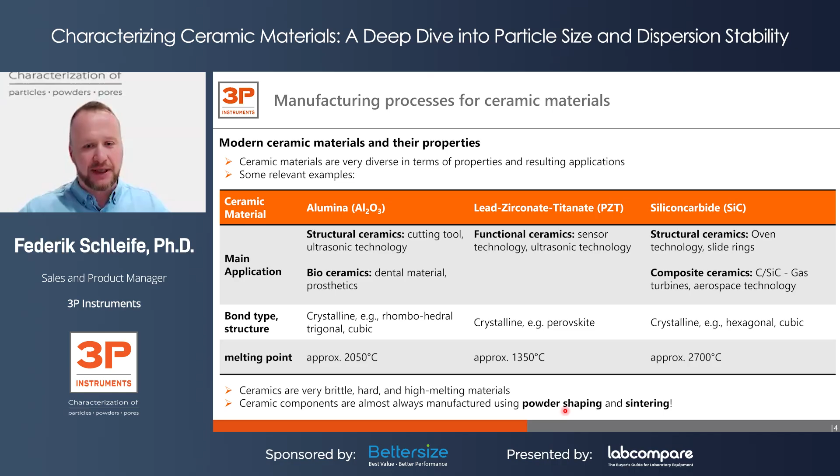What is used is so-called powder shaping and sintering afterwards. Compared to metals, ceramics cannot easily be melted and poured to get them into a new shape, so they need this rather complex process of powder shaping and sintering. Here's how this process is done: it all starts with raw materials—the starting powders, such as alumina, zirconia, or others—as well as the dispersion medium that is needed and some additives.

Additives are used to get the final properties right in shape for proceeding with the process. What's next could be milling to adjust the particle size of the raw material, but not only milling to get it smaller, it could also be granulation.

Why could granulation be needed? Especially if the powder needs to be transported somewhere, it could be advantageous to bring them together into granular material, which eases the transportation. Furthermore, they could be mixed, either two different dry powders mixed together, or mixed with a liquid medium to form a dispersion.

After this further material processing, it gets to the very important step of the shaping process. With this shaping process, the so-called green body is manufactured. This can be done in different ways, which we will see in one of the next slides.

It can either be done in a wet process, like slip casting or spraying, or it can be done in a dry process, like printing presses or hot presses. This step brings the final shape of the piece you want to manufacture and forms the green body. But the individual particles that are pressed together still need to be sintered together to achieve the final performance of a workpiece.

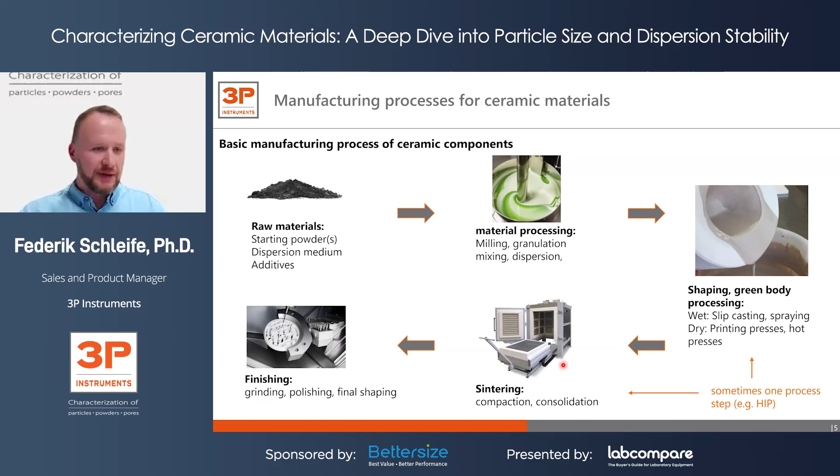As you might have realized, I already gave different names for different processes, but basically they can be divided into two groups for this shaping process. It could either be the dry shaping process, like dry pressing, cold isostatic pressing, but also hot isostatic pressing, which already combines the shaping and sintering process.

But you can also shape these materials in a wet route. Some of those processes include injection molding, slip casting, gel casting. This simply means making a dispersion from powder and a dispersing medium and pouring it somewhere to form the green body during those processes.

Which process you select might mainly depend on the typical application later on. If you go for dry pressing, you might only achieve simple geometries or plates. Maybe this is really cost effective, but does not allow you to form high performance ceramic material.

For others, if you need hard densities or really high performance, you might rather go for some of the wet processes, like slip casting, tape casting, or even tape casting 3D printing, where you can achieve really complex structures or finer workpieces with hard density and high performance.

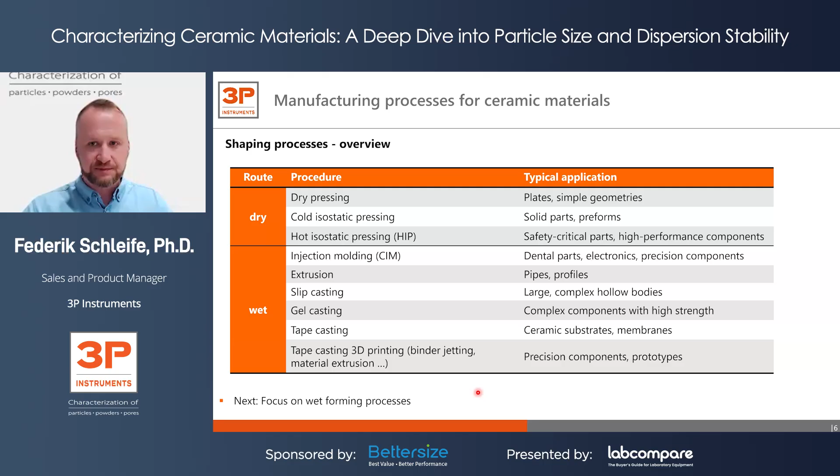As already mentioned several times, there seems to be an influence of particle size distribution, but also the true density of the starting powders, on the process and therefore on the product properties of the ceramic later on.

Let me give you two brief examples of which different types and size ranges we are talking about. Ceramic starting materials are available in various sizes and distribution widths, depending in the end on the application. One example is a sub-microscale zinc oxide, used for the production of resistors, where the majority of particles are below 1 micrometer. This is typically used for such an application.

Furthermore, there are other applications, like this example of microscale indium tin oxide granulates, which are used for electric conductive layers.

So you see here, the size distribution is relatively narrow, normally distributed shortly below 100 micrometers. There's not really a rule that all ceramic raw materials need to be below 1 micrometer or around 100 micrometers. It really depends on the application itself.

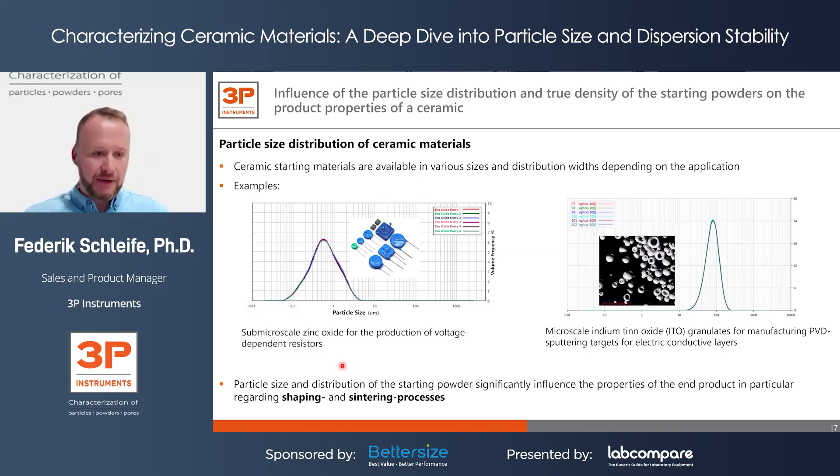First, let's talk about the influence of the particle size distribution on the shaping process itself, during the formation of the green body. What is the main aim of the shaping process? The main aim is that the green body structure later on comes with a high density, a homogeneous pore structure, and small pore sizes.

Why are these three properties of the green body important? A high density is needed to minimize later shrinkage during the sintering process. When the green body is formed and then sintered, this sintering effect will lead to shrinkage. If the density of the green body is not high enough, you get a higher shrinkage, and this is not desired, as you want to keep the dimensions given to the piece during the green body formation.

So why is a homogeneous pore structure needed? Because different pore sizes will behave differently during the sintering process. The larger the pores, the higher the sintering temperature that needs to be applied. The smaller the pores, the lower the sintering temperature could be.

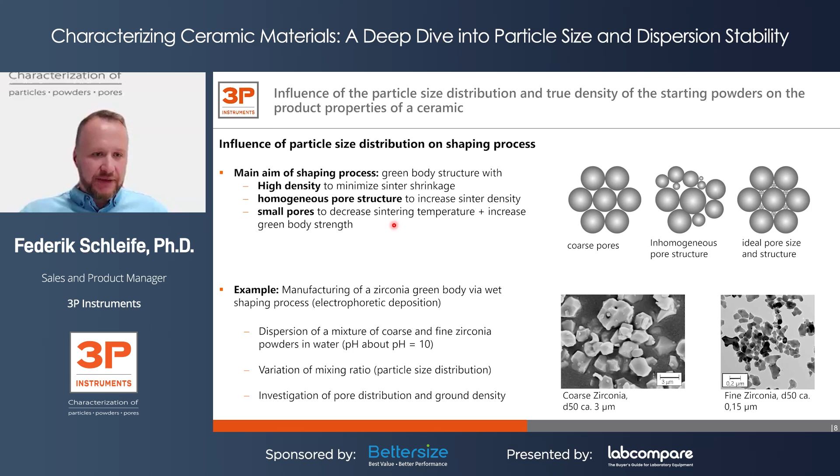For this, I want to give you an example: the manufacturing of a zirconia green body via a wet shaping process during a so-called electrophoretic deposition. There was a dispersion of a mixture of coarse and fine zirconia powders in water with a pH value around 10, and a variation of the mixing ratio of fine and coarse zirconia powder.

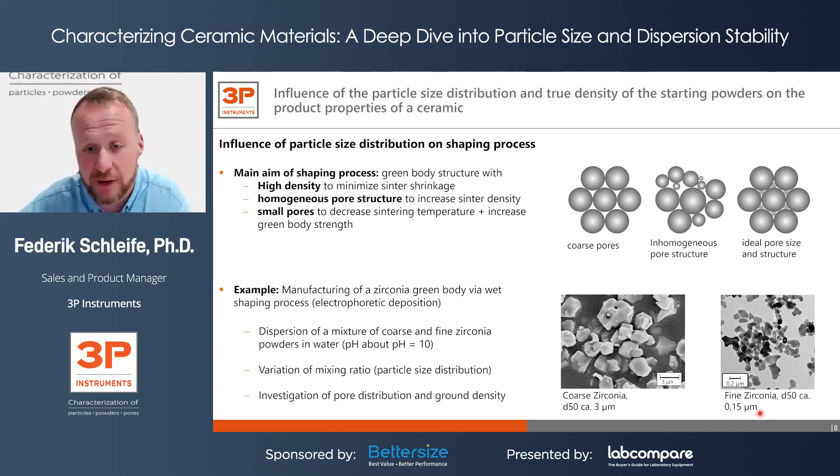It could be investigated, by the pore distribution and also the density, how different mixtures or ratios of coarse and fine zirconia would affect the final process. Here you see electron microscopic images of the coarse zirconia with a D50 of around 3 micrometers, while the fine zirconia comes with a D50 of approximately 150 nanometers, or 0.15 micrometers.

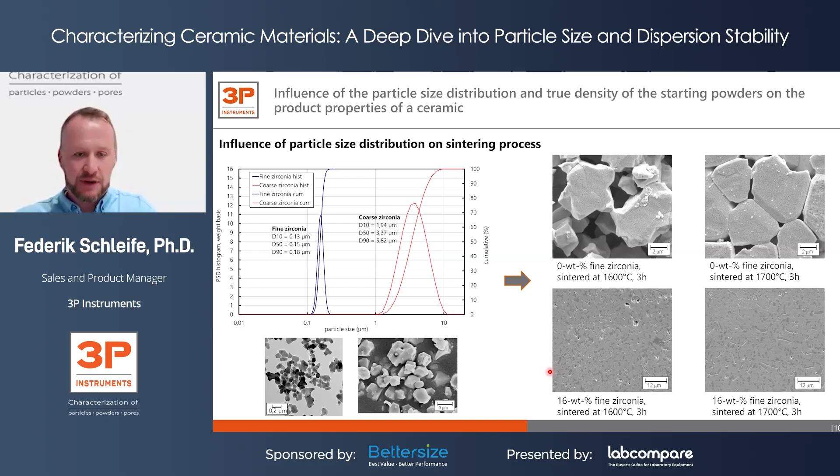So I could show you that adjusting the particle size distribution of the raw material you use for the process has a dramatic effect and influence, either on the green body stability or green body properties, and furthermore, of course, during the sintering process, on the final ceramic piece.

To summarize this a bit: I could show you that when you use pure coarse zirconia with a log normal distribution of around 3.4 micrometers, you might get in the green body one rather narrow peak for the pores around 400 nanometers, but with the lowest relative green density and lowest sinter density, either at 1600 or 1700 degrees Celsius sintering temperature. By increasing the ratio of fine zirconia up to around 10 weight percentage, we got a bimodal size distribution with a D50 of around 3 micrometers.

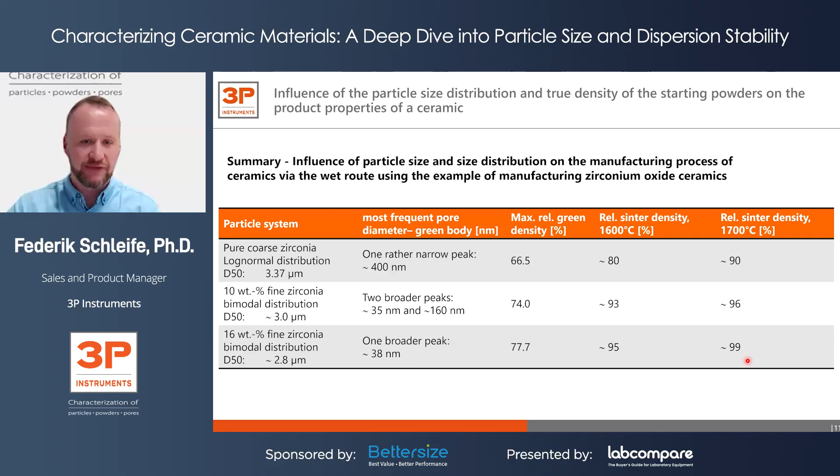For the pore size distribution in the green body, we got a bimodal distribution, so we got small pores and larger pores, resulting in a medium relative green body density and sintering density. Finally, when you use 16 weight percentage of fine zirconia, we got a bimodal particle size distribution with a D50 of around 2.8 micrometers, but we get one pore peak for the 38 nanometer pore diameter, and we achieve really high densities, both for green body and sinter bodies.

So this was for the influence of particle size, but what else can we do with the powder to analyze the ceramic raw material? Another factor that affects the process later on is the true density. I want to show you how the true density can affect the starting powders, or how different densities of starting powders can affect the process or performance of the final ceramic pieces. The true density of a starting powder provides important information about the crystal structure, but also impurities.

Depending on your raw material, for instance alumina or zirconia, they have different true densities. And you can imagine, in case there are impurities in your starting material, you might measure a density different from that of pure alumina or pure zirconia. So true density measurement can already be a quality indicator regarding the impurities of the raw material.

Furthermore, these materials come with different crystal structures, and these could also be identified by measuring the true density. And on the final sintered ceramic, you can also measure the true density, which gives you information about the crystal structure, but also about the sinter density.

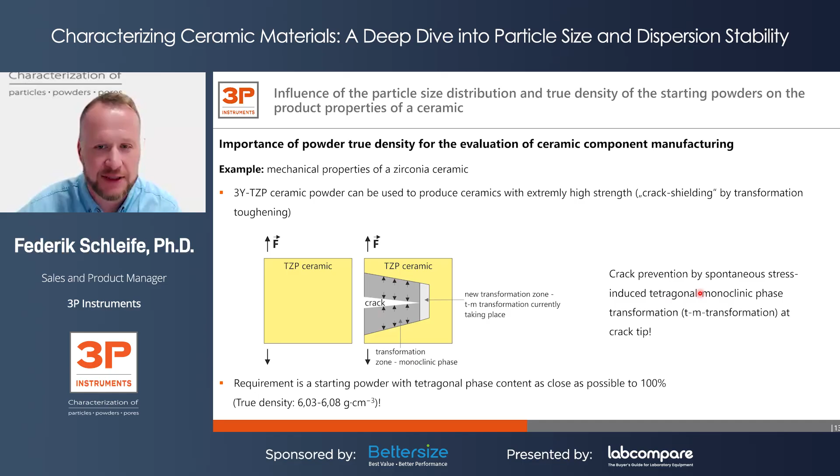What's that? If you apply an external force on a tetragonal zirconia ceramic workpiece, this leads to a crack. The following effect prevents the crack from traveling through the entire system. When there's a crack, it leads to a spontaneous stress-induced tetragonal-to-monoclinic phase transformation, also called T-M transformation.

This happens at the crack tip. Due to the stress applied here, the tetragonal structure will undergo a transformation into the monoclinic structure. As you remember, the monoclinic structure comes with 3 to 5 percent larger volume. This spontaneous increase in volume will prevent the crack from further traveling through the entire ceramic workpiece.

If it were only a monoclinic structure, when there's a crack at one point, this crack might go through the entire piece and you cannot use it anymore. But for high performance ceramics, like in dental applications for teeth, you use those tetragonal structures, because this prevents the piece from being destroyed once there's a single crack somewhere.

So when you want to manufacture such a workpiece, it requires a starting powder with a tetragonal phase, and the tetragonal phase content should be as close as possible to 100%, with no monoclinic crystal structure present. So if you measure the true density of your starting powder in the range of 6.03 to 6.08, you know that this zirconia powder is almost completely in the tetragonal phase, and therefore suitable to manufacture a ceramic like this.

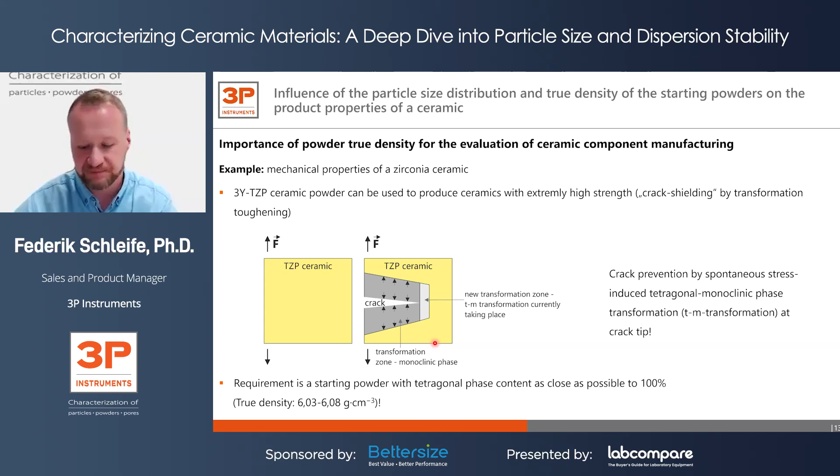So last but not least, let's discuss how slurry stability might affect the manufacturing process of the final workpiece. Slurry stability is important when it comes to the wet route for the shaping process in ceramic manufacturing.

As shown in the slide before, the density of ceramic raw materials is relatively high, especially compared to water - maybe 5 to 6 times the density of water. So ceramic particles might pretty fast start to settle down, to sedimentate in the liquid phase. Therefore, if the particle size is too high, you get really fast sedimentation.

So a smaller particle size would prevent sedimentation for a longer time. If the material density of the particles is very high compared to the medium, or the viscosity of the medium is pretty low, you might also get fast sedimentation. The material density you might not be able to affect, because if you want a final workpiece made out of zirconia, you need to use zirconia particles. But the viscosity of the medium could be adjusted with some thickeners or additives.

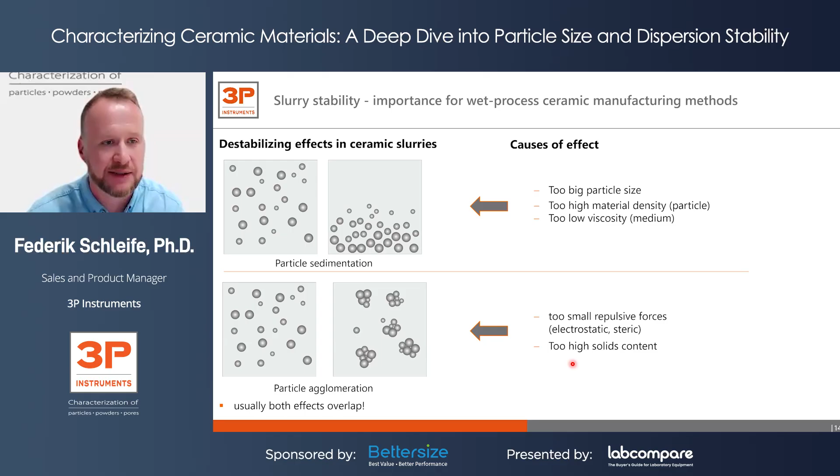Usually both effects overlap with each other, and I'll show you an example which makes it pretty clear that sedimentation or agglomeration would be an issue.

This is a negative effect on the manufacturing process, on the example of tape casting of a ceramic slurry. The tape casting process works in a way that you have a ceramic slurry applied with some blades onto a so-called tape carrier. You have a tape running, and the slurry forms a kind of tape, undergoing a drying chamber, so you could basically form a dried ceramic tape that could be rolled in this shaping process.

But you can imagine if the slurry sedimentates, you get a separation based on solids content and particle size. That means at the beginning of the process you get a lot of large particles, and later on finer particles, which leads to an inhomogeneous dried tape during the shaping process.

Also, when it comes to slurry agglomeration, there's a change in the slurry processing - maybe the viscosity changes during the process, which also leads to inhomogeneous processing.

Furthermore, during the drying process, an inhomogeneous pore structure in the green body will lead to cracking, and in the end, to a smaller green density.

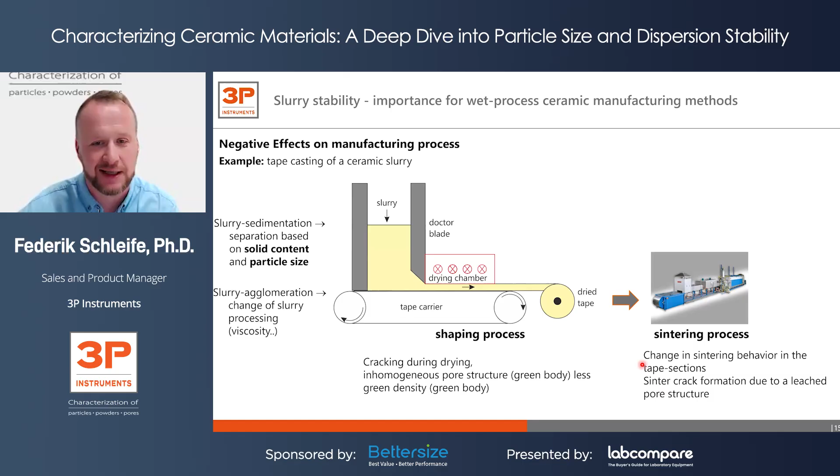So particle sedimentation and agglomeration are likely destabilization effects in ceramic slurries, and you need to try to prevent them, or at least analyze them.

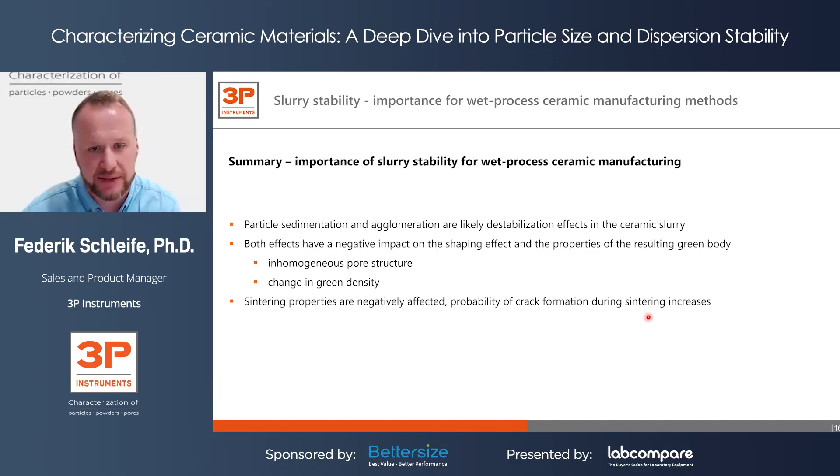Both effects have a negative impact on the shaping process and the properties of the resulting green body, leading to inhomogeneous pore structure, a change in green density, and the sintering properties might be negatively affected, increasing the probability of crack formation during sintering.

So let's come to an end for the first part. I'd like to hand over now to the second part.

With laser diffraction, I hope I could show you that particle size has a major effect on the process itself. Therefore, laser diffraction is a supporting measurement method for investigation and optimization of the ceramic manufacturing process. One instrument that allows you easily to characterize such powder materials, but also later the slurries, is the Bettersizer 2600.

It comes either with a wet dispersion module BT802 or a dry dispersion module BT902, which allow you either the characterization of dry or wet samples.

So why is this widely used, and what are the advantages of laser diffraction?

First is that laser diffraction gives you a really broad and large measuring range. The measuring range for the Bettersizer 2600 starts already at 20 nanometers and goes up to several millimeters. So you can span a really wide range, whether it's submicron ceramics or micrometer particles, they can be measured.

Dry and wet dispersion is available. A laser diffraction measurement is pretty fast, you get a result within a few seconds, and it gives you very good resolution. So even if you mix different powders with each other, you could easily resolve a multimodal distribution. Therefore, you can easily monitor the quality of the starting powders, your raw material, and also monitor any granulation or milling processes, or later on identify and indicate heavy agglomerations if you check the final slurry.

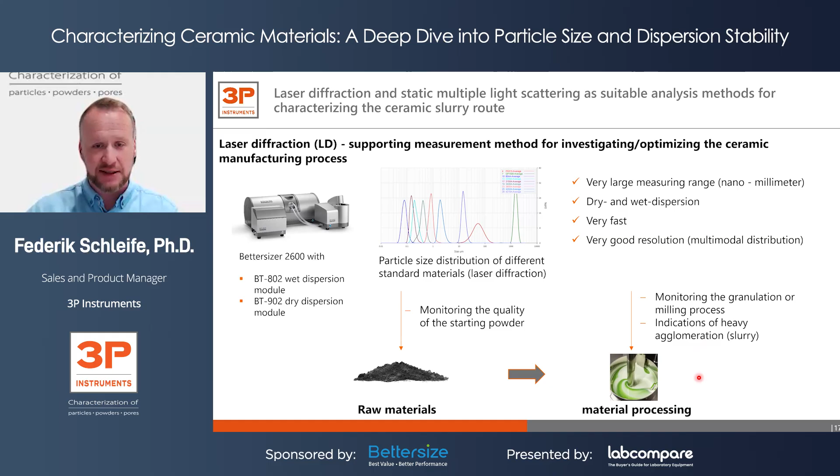Even better, if you combine on a modern approach the laser diffraction with dynamic image analysis, like it can be done with the Bettersizer 2600 and the PIC1 imaging module, you get additional particle shape parameters for further specification of your powders and particles. And combining laser diffraction and dynamic image analysis, you can even increase the accuracy in the coarse range, which might show you if there are any oversized particles in there.

So again, it works pretty well for the raw material with additional information and improvements for feeding compaction or others. And also you can get additional information for your slurries, like the flow behavior, the slurry solid content, and others.

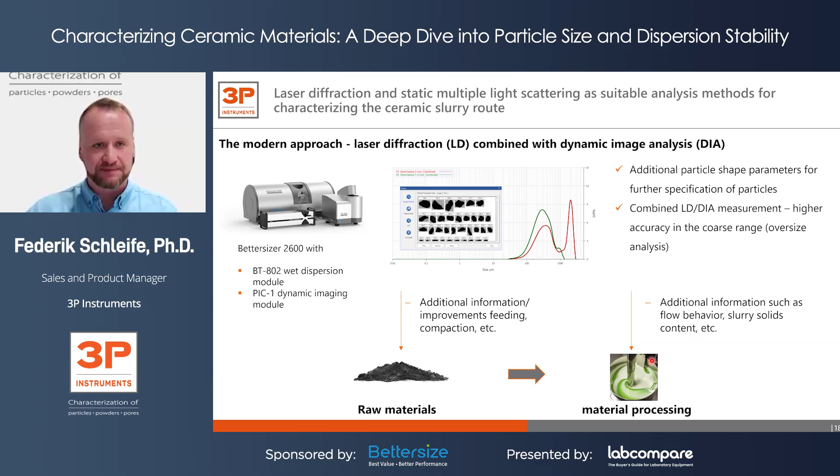To analyze the dispersion stability, there's one instrument or technique that is widely used, static multiple light scattering, for the qualitative and quantitative characterization of ceramic slurries. With the BeScan Lab, which you will see in the second part, you can analyze sedimentation and/or agglomeration behavior of those slurries in a great way.

So it gives you really a qualitative verification of the effects of sedimentation and agglomeration. It allows you to quantify those destabilization effects via the so-called instability index, and it offers concentrated and/or diluted dispersion measurement by measuring in transmission and backscattering. So this is mainly the stability test for the finer ceramic slurry.

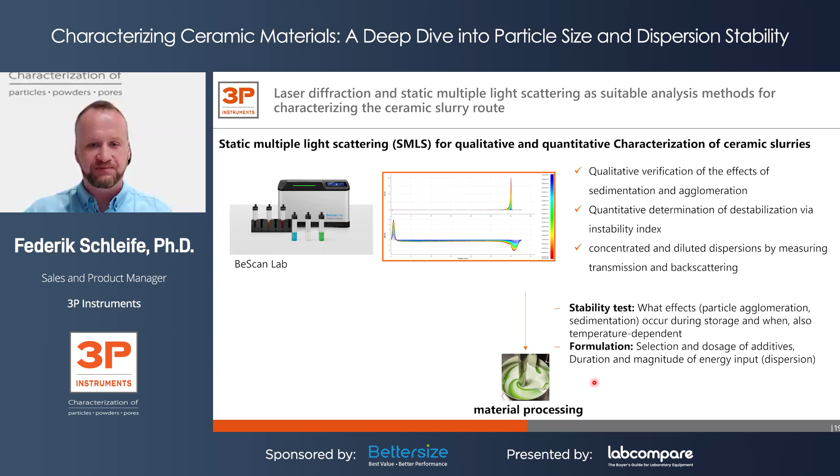So that's for my first part, and with this it's my pleasure to hand over to Wenjian for the second part, where we get more details about the analysis itself, the technique itself, and the instruments that are used to characterize the ceramic materials. Thank you, Freddy, for your comprehensive introduction.

Hello everyone, I'm Wenjian, an application scientist from Bettersize. We have just learned how ceramics are made, from raw mineral to finished products, and why particle size plays such an important role across the manufacturing process. We also saw how green density and slurry stability affect the quality of ceramic. In this slide, I will explain how these parameters can be measured and share some real application cases.

In part one, I will demonstrate the measurement principle of laser diffraction and dynamic imaging for particle size and shape analysis, and the benefits of combining these two techniques.

So what will happen if we don't carry out particle sizing? The answer is that the product's quality cannot be guaranteed, because uncontrolled particle size often leads to structural defects. There are various processing methods for ceramic material, and particle sizing can be performed in several critical steps. For example, particle sizing can be used for quality control to monitor the particle size of raw material, or to evaluate whether the material is evenly mixed before further processing.

Shaping is a crucial step in ceramic manufacturing, and different shaping methods specify different requirements on particle size and distribution in powder. Here I will list some examples. In dry pressing, ceramic powder will be filled into a die and pressed by punches, whose particle size and distribution needs to be specified to make sure of good packing efficiency.

Sometimes particle sizing for granule is also necessary, since granule with appropriate size increases particle flowability. In slip and tape casting, ceramic slurry will be poured into a mold. Control of particle size is critical since slurry stability is greatly affected by particle size, and a stable slurry reduces the possibility of cracking or warping.

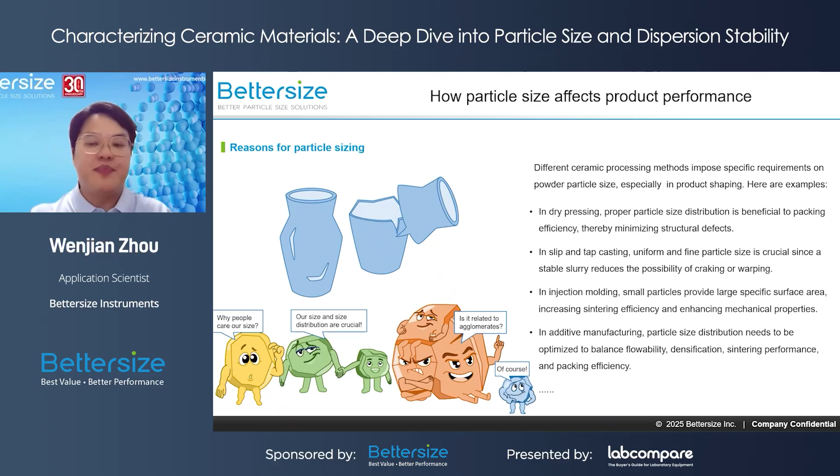In 3D printing, particle size and distribution needs to be optimized to balance the flowability, densification, sintering performance, and packing efficiency. On the previous slide, we learned how particle size affects the manufacturing of ceramic product. But then comes the question, what is the most popular way to measure particle size? The answer is the laser diffraction technique. In this slide, we will figure out how we use laser diffraction to analyze particle size.

Imagine a particle in the measurement zone irradiated by a laser beam, so part of the light gets scattered. Scattering can be considered the combination of four light phenomena: reflection, attenuation, refraction, and diffraction.

Let's focus on the right part of the slide. If the particle is large, most of the light is scattered in the forward direction, resulting in a diffraction pattern with an intensive central spot. As the particle size increases, the central intense peak becomes narrower in the diffraction pattern.

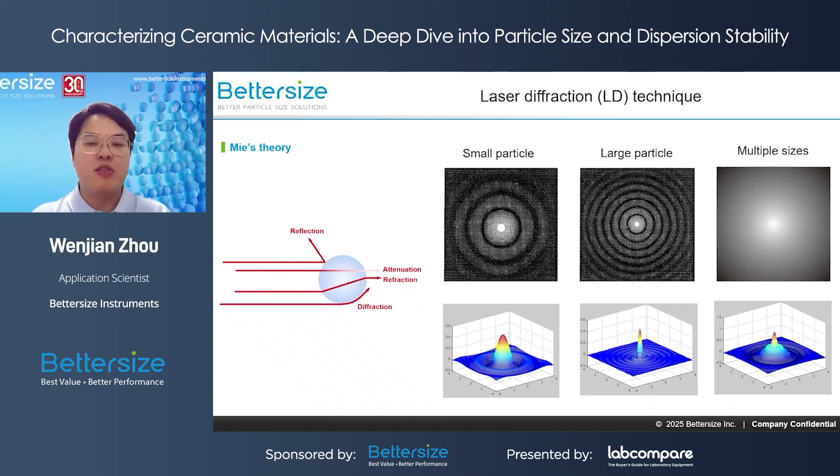Suppose there are many particles in the sample cell. The overall pattern can be considered the superposition of diffraction patterns caused by individual particles. These scattered signals are then received by the detectors and further processed by the software to calculate the particle size distribution based on Mie theory.

We have gone through the basic principle of how laser diffraction works to determine the particle size. Let's take a closer look at the actual particle size analyzer.

An illustration of the simplified interior structure is shown on the right side. In general, samples need to be added to a dispersion module and transported to a sample cell, where they will be irradiated by a laser beam, producing scattered signals to be analyzed by the software.

What Bettersize can offer is the Bettersizer 2600 Laser Diffraction Particle Size Analyzer, which provides reliable and accurate measurement with its patented optical design ranging from 0.02 to 2600 micrometers.

This instrument is also characterized by multiple dispersion modules, allowing it to handle a wide range of samples, from dry powders and liquid suspensions to organic materials, and even valuable samples with small volumes.

What's more is the Bettersizer 2600 can be equipped with a dynamic imaging system, which enables the measurement of coarse particles up to 3,500 micrometers and provides detailed particle shape parameters. An auto-sampler is also available for fully automated measurement of up to 60 samples with just one click.

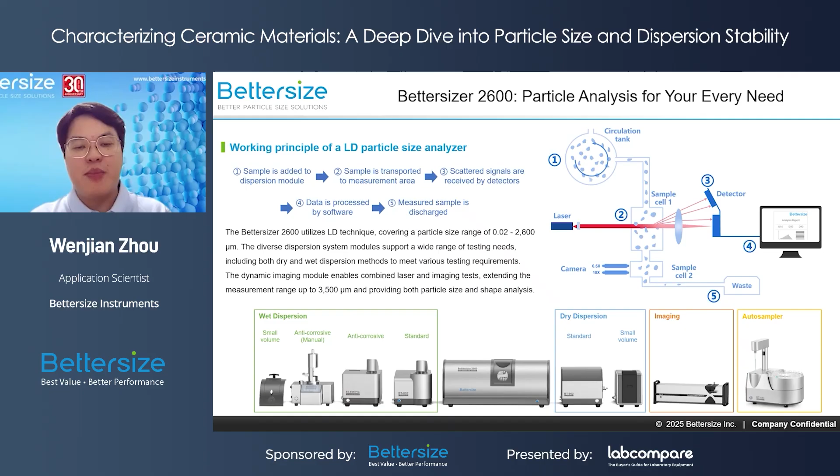In this way, the Bettersizer 2600 not only offers versatile dispersion modules for different sample types, but also enables dynamic image analysis for detailed particle size and shape characterization, and supports fully automated measurements using a dedicated auto-sampler to minimize human intervention. As we know, the laser diffraction system already provides a wide measurement range.

So why do we combine the laser diffraction system and the dynamic imaging system, and what benefits can we get from this combination technique? Let me answer the first question: why we need a dynamic imaging system.

Suppose there are few coarse particles among a large number of small particles. The scattered signal intensity from the coarse particles is very weak compared to that from the small particles. As a consequence, the scattered signals caused by the coarse particles are hidden, appearing either as noise signal or as part of the scattering contributed by the small particles.

Image analysis solves this problem by capturing images of individual particles, including the few large ones, and processing them to generate size and shape parameters.

Images do not lie. They provide intuitive results so that we won't miss coarse particles, and up to 24 particle shape parameters can be provided, including circularity, Feret diameter, and aspect ratio.

Besides, the dynamic imaging system is highly sensitive to coarse particles, extending the upper measurement limit to 3,500 micrometers. Outlier particles, such as bubbles and agglomerates, can be reviewed because each particle is photographed, which can further be used to evaluate whether the dispersion status of the sample is good or not.

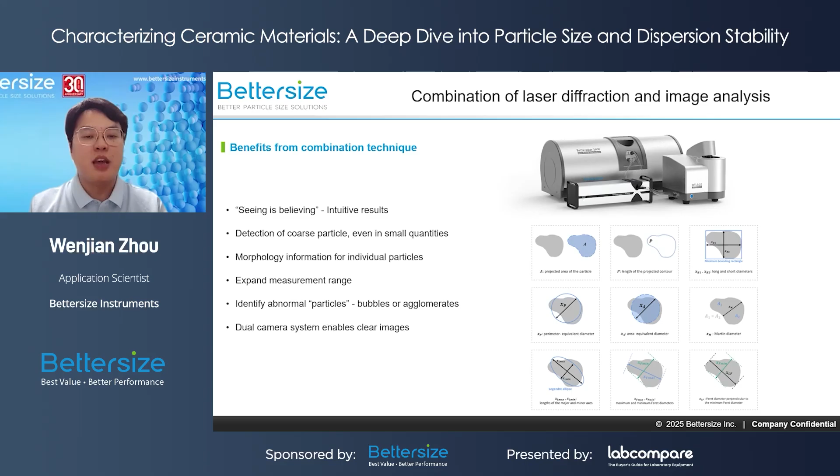Two cameras with different magnification are installed in the dynamic imaging system to ensure clear images of every particle. Therefore, measurement accuracy can be guaranteed.

Here is a real case that shows why it is important to detect unexpected particles. The sample here is zirconia powder, which we disperse in water for full dispersion. As mentioned earlier, even a small amount of abnormal coarse particles can significantly affect the final performance of the product.

Let's focus on the particle size distribution curve. If we only use laser diffraction, we get an orange curve, and everything looks normal, with no signal of abnormal coarse particles. But when we activate the combination test, something interesting happens.

We can see there is a small ghost peak at around 120 micrometers. And when we check the individual images of the particles, we can notice that there are particles whose size is around 120 micrometers in the sample. This indicates the high sensitivity of the dynamic imaging system to coarse particles.

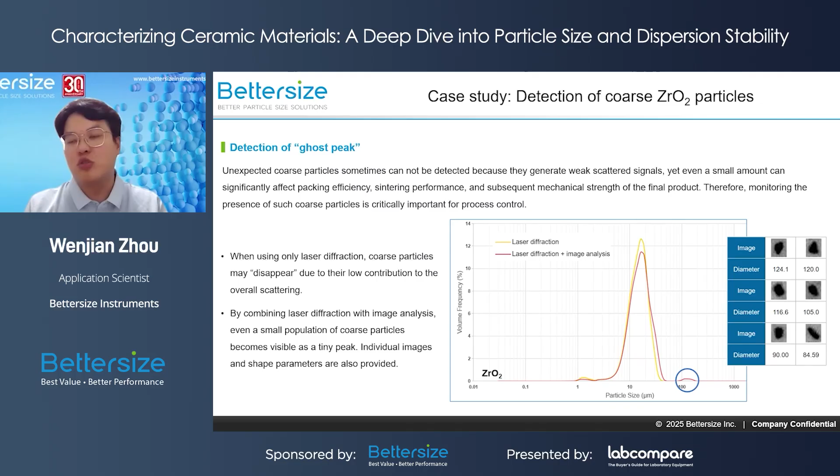Okay, we already know how to measure particle size by combining laser diffraction technique and image analysis. Let's shift to another important parameter, the true density.

The true density is defined as the mass of the solid material divided by the volume it actually occupies, excluding the volumes of open pores, closed pores, and interparticle pores.

True density is essential in ceramic manufacturing, especially in the shaping step, as it provides a basis for evaluating sintering behavior. It can be used to help us understand porosity.

This is critical because applications have different requirements on porosity level. For example, structural ceramics are made of dense material for strength, while catalysts need high porosity for specific surface area.

And the true density allows us to optimize slurry solid loading. When preparing a slurry for casting or 3D printing, knowing the true density ensures the right particle volume fraction, which can prevent structural defects. True density also helps us predict the shrinkage and the final dimension.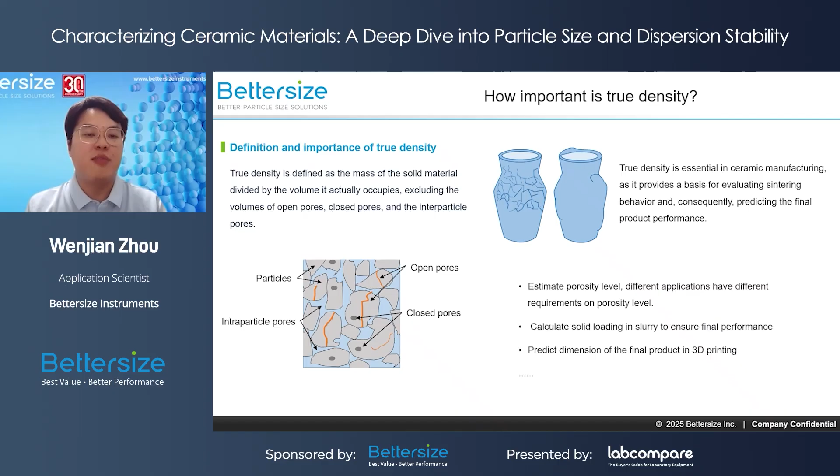Using true density, we can calculate how much shrinkage to expect and optimize design so the final part is the correct size. In short, understanding it lets us achieve precise and high performance ceramic every time.

So, how can we test true density quickly and convincingly? The answer is using a gas pycnometer.

Before getting to know what a gas pycnometer is, we need to understand the principle behind it. The key of the principle is Boyle's law, and it demonstrates that a gas pressure times the volume is constant when the temperature and the mass of the gas are constant.

By applying this law, let's see how a gas pycnometer calculates the true density. A typical gas pycnometer has a sample chamber, a reference chamber, a pressure transducer, and three main valves: the fill valve, expansion valve, and a vent valve.

Imagine we are using a gas pycnometer now. We start the measurement by opening the lid and placing the sample in the sample chamber. Close the lid, keeping the expansion valve closed. Open the fill valve to allow a specific amount of gas to enter the sample chamber. Then close the fill valve.

The pressure at this point is recorded as P1. Next, we open the expansion valve, allowing the gas to flow through the sample chamber to the reference chamber. Once equilibrium is reached, the pressure is measured as P2.

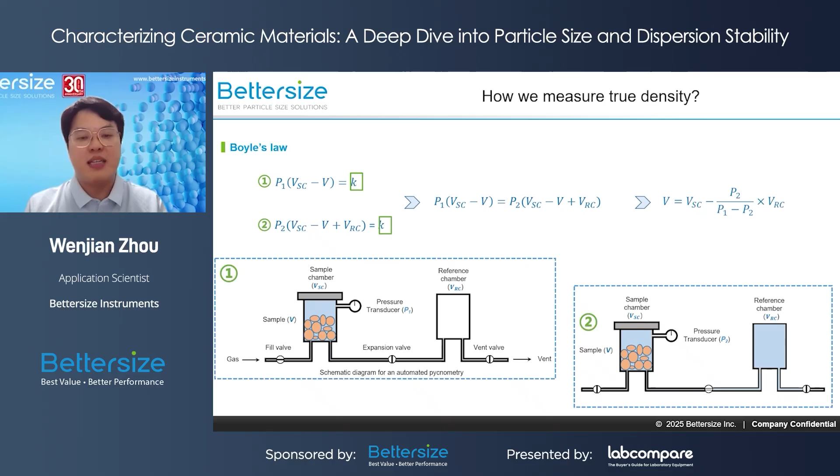Suppose the volume of the sample is V, and we can use Boyle's law to obtain two equations. The volumes of the sample chamber and the reference chamber are already known, along with the recorded values of P1 and P2, so the volume of the sample can be calculated by the software. With the sample's mass easily obtained with a precise balance, we can then determine the true density.

With the gas pycnometer from Bettersize, we benefit from enhanced capabilities. The BetterPyc 380, combined with its user-friendly software, provides extensive measurement options, including volume, density, solid content, and open cell content, making it suitable for a broad range of applications.

It offers rapid, highly accurate measurements with an accuracy of 0.02% and operates within a flexible temperature range of 10 to 65 degrees Celsius, accommodating diverse sample conditions.

The system can also be equipped with 316 stainless steel sample cups, ideal for handling corrosive material like cement to ensure long-term durability.

With a volume capacity ranging from 1 to 100 cubic centimeters and automatic chamber volume matching, it adapts to various sample sizes. In summary, the BetterPyc effectively measures hard foams, liquids, solids, semi-solid mixtures, and slurries, making it a highly adaptable solution across industries.

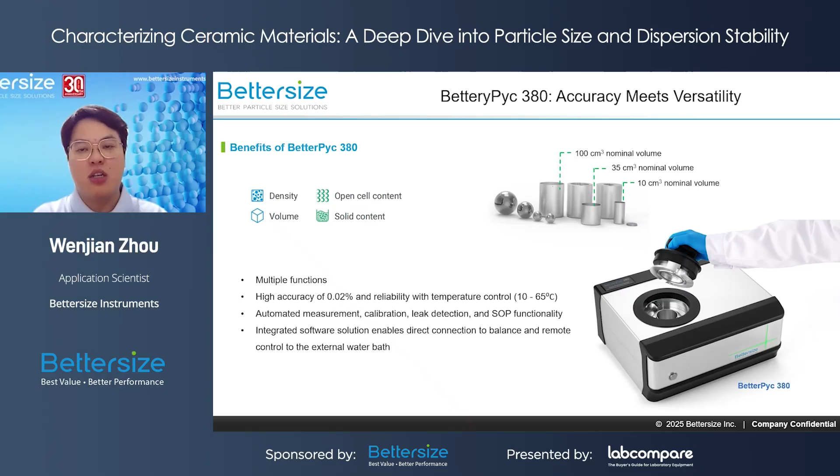Based on the measured volume and the true density, three yttria-stabilized zirconia ceramics were analyzed to evaluate the porosity level of the material to determine the appropriate 3D printing parameters for ceramic prostheses.

If the porosity level is high, the green body shrinks greatly after sintering, probably leading to structural issues or non-specific size. Understanding this parameter is crucial because it directly affects the final dimensions, mechanical properties, and overall performance of the printed ceramic parts.

Samples with a porosity level between 10 and 15% are generally considered good. We measured 3 samples, and sample 1 performed better than samples 2 and 3 because it has the lowest porosity level.

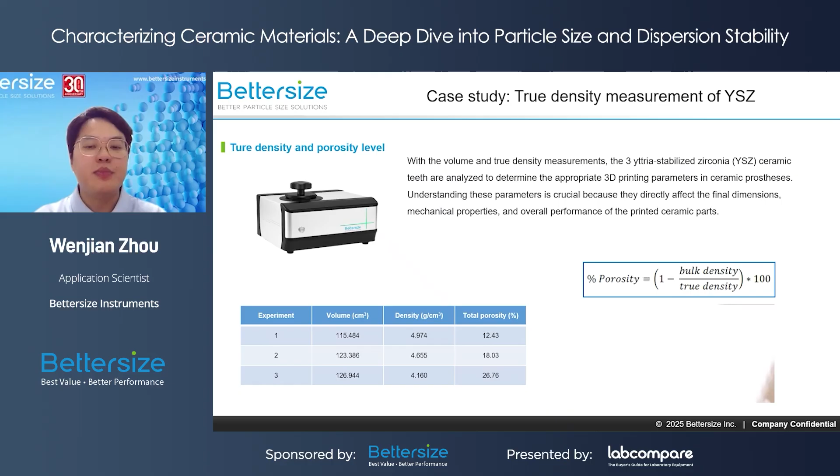So far, we have talked about two techniques for measuring particle size and true density in dry powders. Now let's shift our focus to something different: a method that helps us understand the stability of a liquid suspension.

So what do we mean by stability? In general, stability is the ability to resist changes. When we talk about dispersions, it means how well the particles can stay evenly distributed without sedimentation and flocculation.

Now, what actually affects this stability? First, we look at interparticle force. On one hand, we have van der Waals attraction, pulling particles together. On the other hand, we have electrostatic repulsive force, pushing them apart. The balance of these two is explained by the DLVO theory, which describes how this force changes as the particles get closer or farther from each other.

Moving on, let's think about steric hindrance. This happens when polymers or surfactants coat the surface of the particles, creating a physical barrier. That barrier makes it harder for particles to stick together, which helps improve stability.

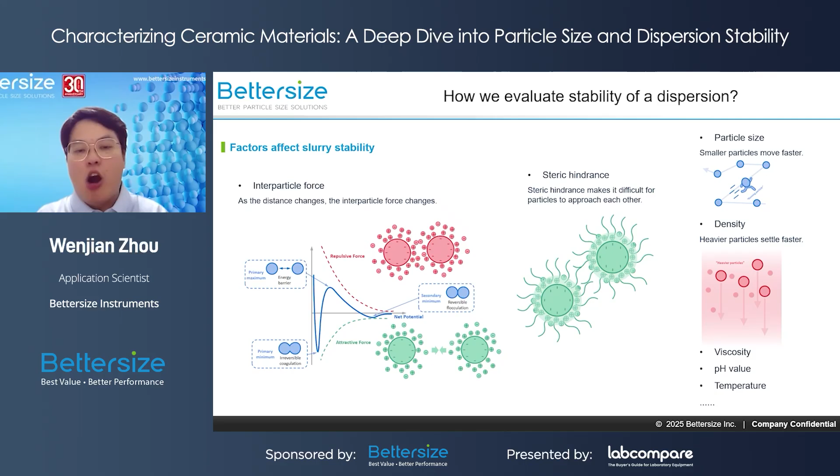Another important factor is particle density. If the suspended particles are much heavier or lighter than the liquid around them, they tend to settle or float more easily, which lowers stability. And finally, we shouldn't forget about other conditions like viscosity, temperature, and pH. All of these can influence how stable the dispersion is.

We have talked about the factors that influence dispersion stability. The next question is, how can we actually evaluate the stability? The answer is the static multiple light scattering technique.

It is an optical method to evaluate stability by detecting the variations of transmitted and backscattered signals. If the signal variation is slight, that means the changes in the dispersion are slight as well, and in turn the slurry is stable. Here I demonstrate how SMLS works.

A setup that contains an LED, a forward detector, and a backward detector moves vertically along the sample cell to capture the transmitted and backscattered signal every 20 micrometers. For transparent samples, we use the forward detector to capture the transmit signal. If the sample is opaque, we use the backward detector, since in this case transmission is almost blocked.

Let's take sedimentation as an example. Suppose the sample cell is placed horizontally, so the x-axis represents the height of the sample cell, and the y-axis is the reference backscatter signal. Over time, we observe that the signal increases at the bottom and decreases at the top.

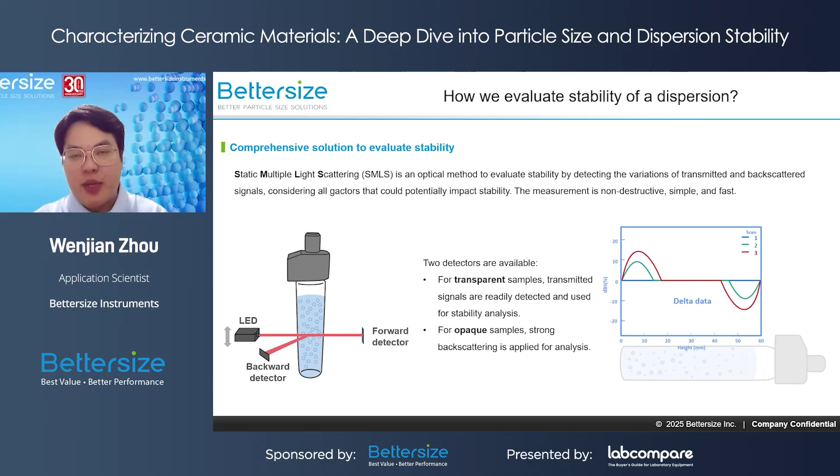In addition to qualitative analysis, we can also perform quantitative analysis using what we call the instability index, or IUS. IUS is calculated by accumulating the variations in light intensity between two consecutive scans. The principle is simple: if the light intensity changes a lot, the IUS value goes up. And the higher the IUS, the less stable the system is.

Now, because each scan provides a new IUS value, we can generate an IUS trend curve over time. This allows us to see not only how quickly the IUS increases, but also how long it takes for the IUS to reach a certain value. What's more, we can also use this IUS to compare different samples. By looking at their IUS values, we can directly figure out which slurry is more stable.

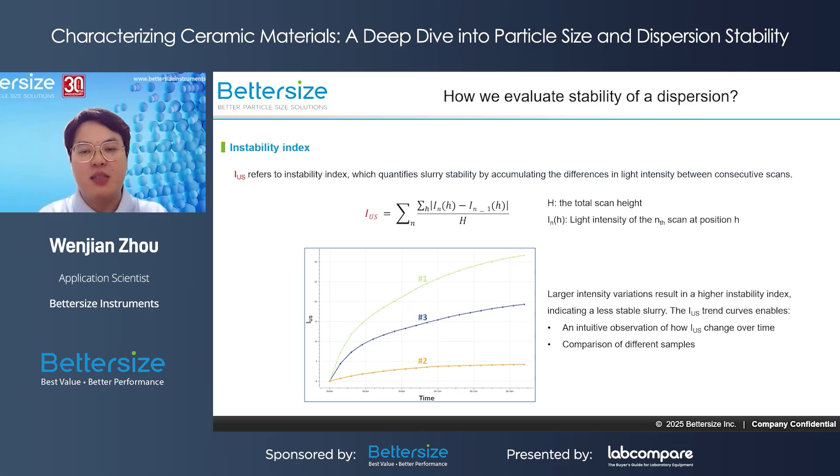At Bettersize, we offer the B-Scan Lab, which utilizes the SMLS technique to analyze slurry stability. The measurement process is non-invasive, simple, and fast, meaning we can measure the sample directly, without any preparation.

And thanks to its optical system, the B-Scan Lab can handle a wide range of samples, from diluted and transparent ones to opaque samples with high solid loading. The signals are captured every 20 micrometers, and because the scanning interval is so small, even the most subtle variations in light intensity can be detected.

For efficiency, up to 10 B-Scan Lab units can be connected to a single computer, allowing 10 individual measurements to run simultaneously. This not only increases operational flexibility, but also saves valuable time.

Temperature control is available from room temperature up to 80 degrees Celsius. This makes it possible to study stability under high temperatures, or to track how the IUS changes with different temperatures.

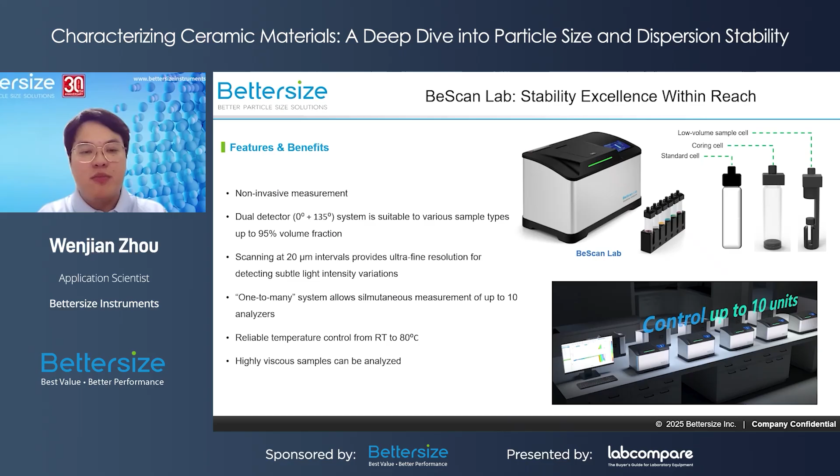Finally, we offer three types of sample cell. In addition to the standard cell, we have a coring cell, which is designed for highly viscous samples, and a low-volume cell used for valuable samples.

Let's take a look at a real case of stability evaluation. In this measurement, we measure four zirconia slurries. At first glance, all four samples look exactly the same.

In fact, no changes could be observed with our naked eyes. In this case, we need to ask BeScan Lab for help.

In most cases, slurries are highly viscous since their solid loading is very high. The samples are concentrated and opaque, so we rely on backscatter signals rather than transmit signals. Because the slurry is so viscous, the particles move very slowly, so the changes in light intensity are quite small.

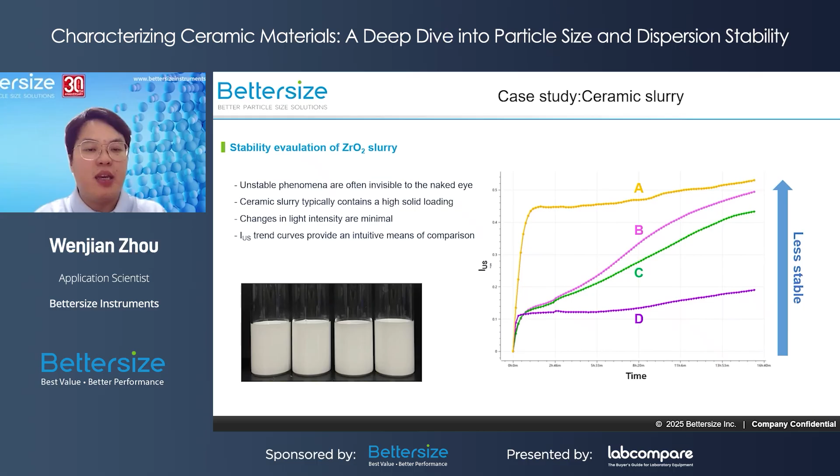The IUS value for 4 samples were relatively small, which indicates good stability overall. However, when we compare their IUS trend curves, we notice that sample A shows a sharp increase in IUS at the very beginning, and then the increase slows down. Sample A is the most unstable during the measurement, but the IUS values of samples B and C grow rapidly later on, and probably exceed sample A if we extend the measurement time.

Here are the key takeaways from today's talk. First, particle sizing really matters. It has a direct impact on ceramic products quality. With the Bettersizer 2600, we can combine laser diffraction with dynamic imaging, meaning we can not only detect coarse particles that might be missed by laser diffraction alone, but we can also analyze particle shape.

Next, true density measurement is equally important. Using the BetterPyc, we can easily measure the true density, which helps support the correlation between the powder and the final part density, and thereby evaluate the product's performance.

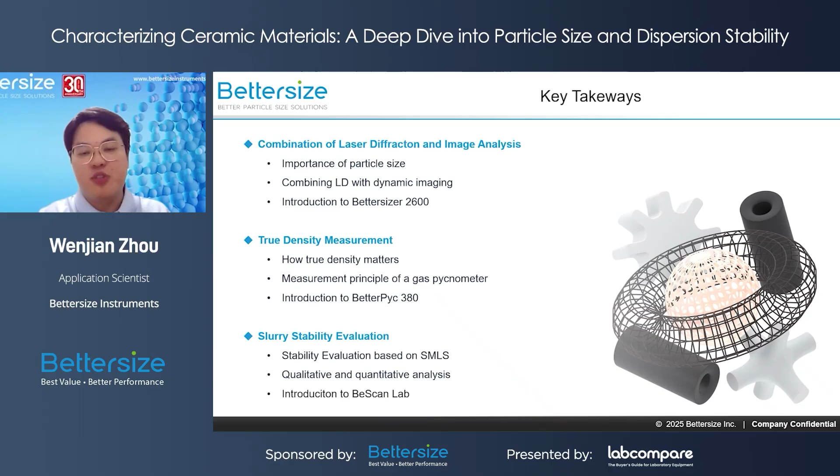And finally, when it comes to slurry stability, the static multiple light scattering technique gives us both qualitative and quantitative insights. The BeScan Lab makes this process flexible and efficient, with high scanning resolution, precise temperature control, and multiple sample cell options. That's all I'd like to share today.